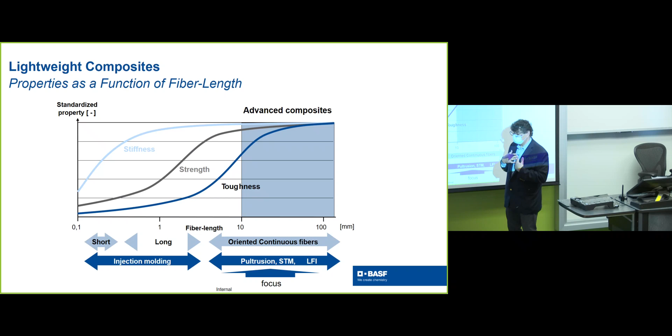As I said, we have this lab, and BASF really works in all spectrum of composites. From injection molding, we do small pellets with short fibers. But our team is really focused on the area of high toughness, high strength and stiffness all together, because we want to utilize the length of the fiber. The longer the fiber, the higher the strength. So for each fiber size, there is a technology to manufacture that.

You can see it on the lower bottom, but I'm going to focus on two technologies that we think are a breakthrough in this area, which is pultrusion and spray transfer molding.

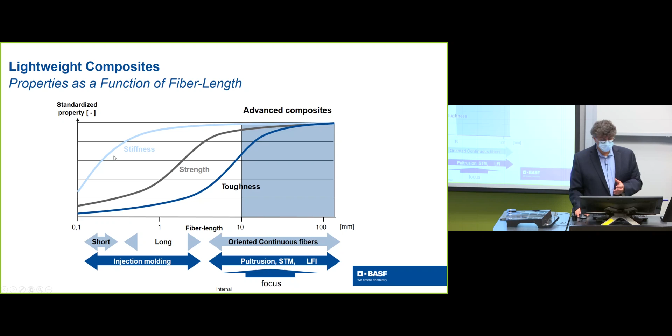Now, pultrusion, you might say, why pultrusion? If I look at this graph, pultrusion shows the highest strength or tensile strength, and the reason is it has a higher volume fraction of glass fiber. So it's tempting. And if you compare those numbers to high strength steel, I am there. So this is really good. I'm comparing this to steel. This is much lighter, but yet it gives me the strength.

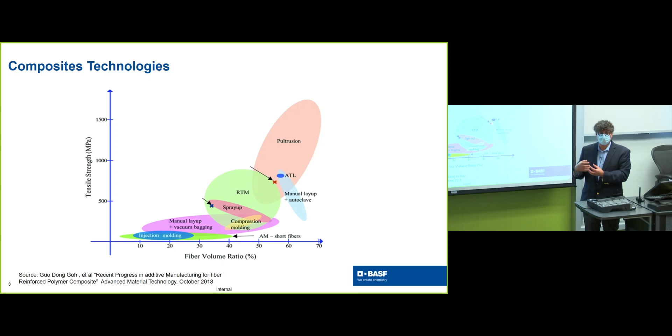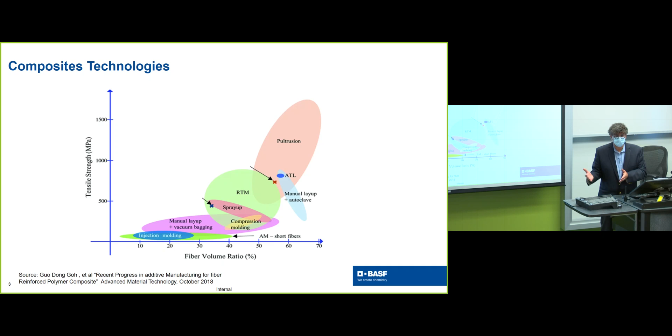So that's one advantage. The other one we looked at is RTM, or what we call high pressure RTM. High pressure RTM was used in the industry, they like it for automotive, but it doesn't give us enough parts per year. And they're not happy with that, because if you think about Ford and Toyota with those big cars, they make 150,000 a year. So 40,000 doesn't fit. That's where we said, let's focus on pultrusion because it's high strength.

I can really look into how I can accommodate that as a high throughput, and we'll talk about it. And also, there's a technology that we adopted and developed. We call it STM, spray transfer molding, and I'm going to talk about it more.

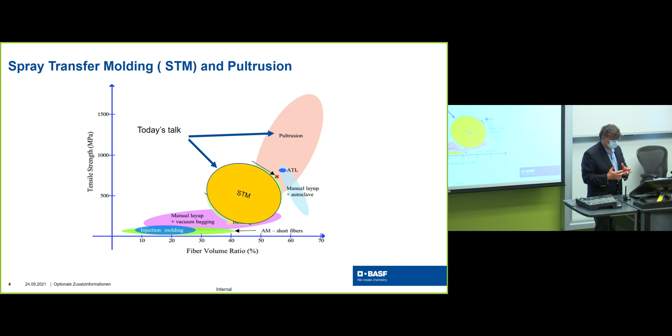Now, high pressure RTM, I don't know how much you know about that, but it's eventually resin transfer molding. That means I have a resin and I will inject that resin into a cavity. To do that, I need to have layups with the fabric. I have to put it in a tool to preform it, to have it almost the same shape as the end part. Once I have it stabilized, I will take it and inject at high pressure.

Remember, fibers here are continuous fibers. So when I inject, some of the inlets could be on the side, not the top. This could distort the fibers. Then we wait for curing and demolding. So that's the whole process. But eventually, you can see it's 2 steps, meaning every step is a cell or a production place in the industry.

Now, let me lay down the disadvantages. If you inject urethane, which is a liquid, onto a dry fiber, think about it. High pressure coming into that inlet will first start pushing the fabric away because it's a high pressure. So I don't get the benefit of continuous fiber because it gets distorted. The other thing is the cycle time is not there yet, it's like 3 to 5 minutes.

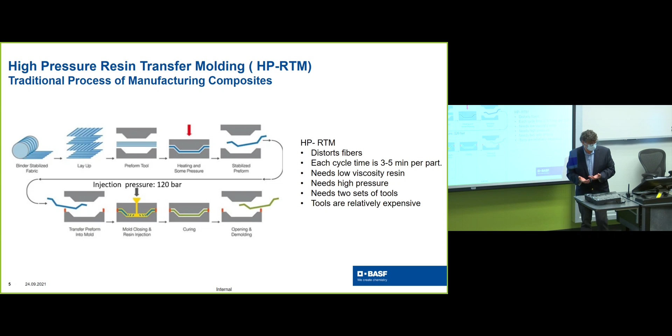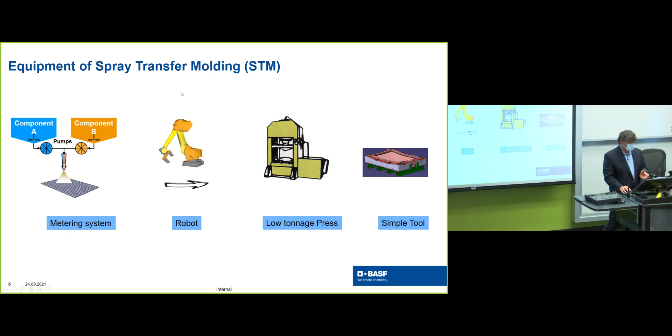So the alternative is what we call spray transfer molding. This is a technology where the equipment is like a metering system, meaning I have the liquid chemistry - an A and B component that come together and start reacting. So I have the equipment, I have a robot, and the robot is the center of this application. I'll explain how. We need a low tonnage press and a simple tool. So from a cell equipment standpoint, it's much cheaper than high pressure RTM, but in terms of what it does, it makes a lot of impact.

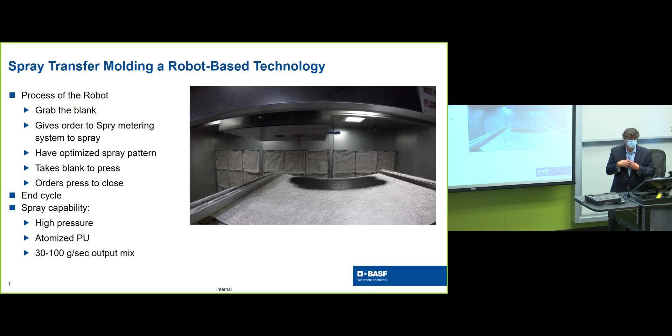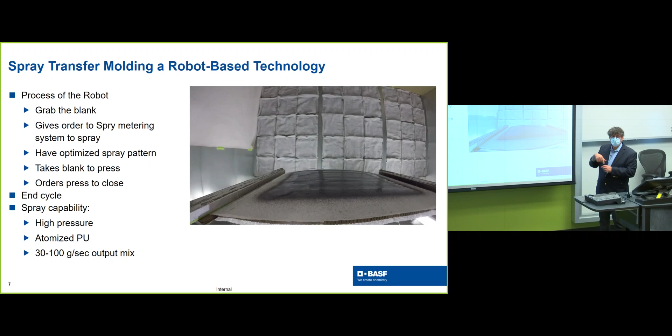I'm going to play this video and you can see what's going on. So I have a robot, and the camera is on the robot. The robot comes and grabs the glass fiber, as you can see here. Now the robot gives a command to the spray to start spraying, and we program where we want to spray. On the other side, I can also spray a glass fiber. Look at it, I optimize the spray, now going around like the pinch edge. So eventually, I can control where I want to put the spray. Not only that, I don't have lots of scrap, and it's at 90 degrees, if you notice. So eventually, I don't distort the fibers. There's lots of advantages we can benefit from.

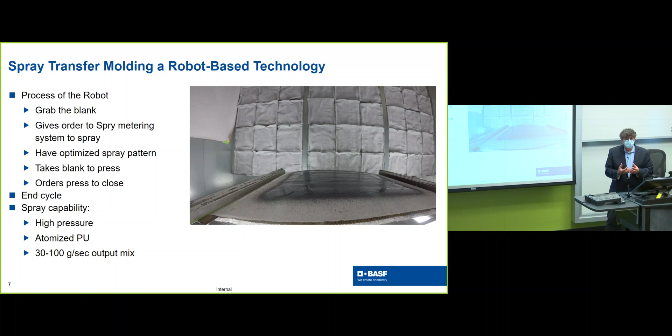Now, if you notice, this is a honeycomb. This is a technology for making a honeycomb load floor that we're adapting to make more of a composites part. Now, the robot goes to the press.

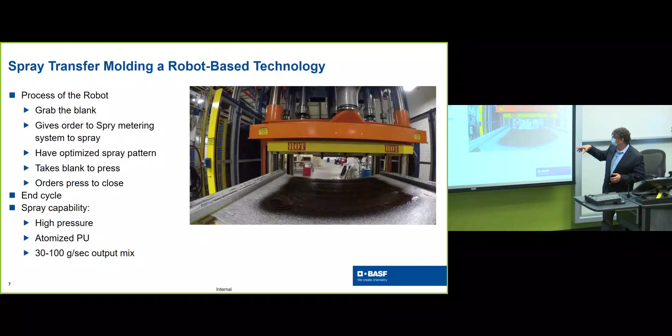There is a tool in the press, of course. Then the robot closes, the tool closes, the robot gets out, and orders the press to close. So eventually everything is controlled by the robot. The robot talks to all those stations. And if I don't like the outcome, I can go back to the software and change the spray pattern.

I'll show you some pictures. So all in all, as you notice, we take an empty dry fiber and spray it on top at 90 degrees. That gives me an advantage. The cycle time you saw here, part to part, is 90 seconds. So I'm saving from 3, the minimum, to 5.

I'm starting from 90 seconds, and even in that time you saw the robot spraying one side. We can have the robot put 2 spray heads so it can spray both sides, cutting the cycle time much more. So there are lots of advantages in this technology.

The other thing is this is high pressurized, atomized urethane that gets into the glass fiber. So it penetrates well, it impregnates it well, and I impregnate locally. I can spray from 30 to 100 grams per second, it depends. Right now I'm only spraying 30 grams per second, and that's enough.

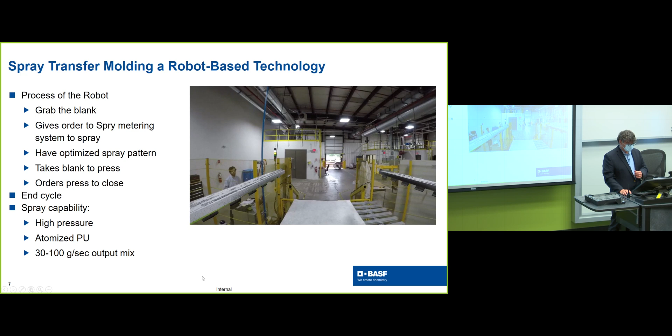So eventually that goes back - I'm ahead with the slides - it's really localized wetting, and we're emphasizing that. I program my robot where to spray and how to spray. Keep in mind, you need some knowledge of the urethane, or the liquid, and how it's going to flow in the mold. That gives you an advantage.

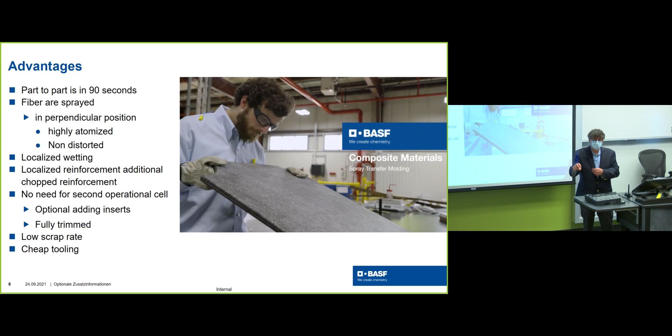Because I don't want to spray places where the flow is going to go into the cavity and get stuck there with a lot. So I have to spray more in certain areas, less in other areas. I have that option, and I will show you some parts.

So this is a huge part. When you come to my lab, you will see it. It's an underbody, about 1.5 by 1.6 meters in size. It has corrugation because this is a tool we made - we wanted to go after things like truck beds and the underbody of the car. The truck bed, if you notice, is corrugated kind of a thing.

The first run, we did the sample spray. This is the latest, but this is the more... If you notice, I sprayed first, and if I enlarge it - or you can come see it - you see lots of gaps here on the edges, and it doesn't cover those gaps very well, while I have lots of urethane in the middle. So what we did is we went back and optimized the process.

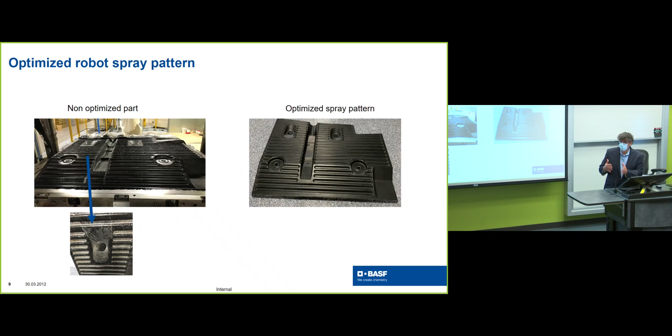I have more urethane sprayed on the upper side, less urethane here, by changing the height of the robot, the speed of the robot, and where to spray. So I got the perfect part. It's beautiful, actually - I always call it a beautiful part, but it is a good part. So we know that by optimizing, it gets you where you want without really distorting the fibers.

So where can we go with this technology? I have a small video on that.

As I said, the honeycomb application is where we started - that's the part in your hand. It has a core, paper core, and glass fiber on top and bottom. But we can go beyond that. We take the glass fiber and change it to natural fiber. We can take the paper core and change it to no core, getting more of a thick composite.

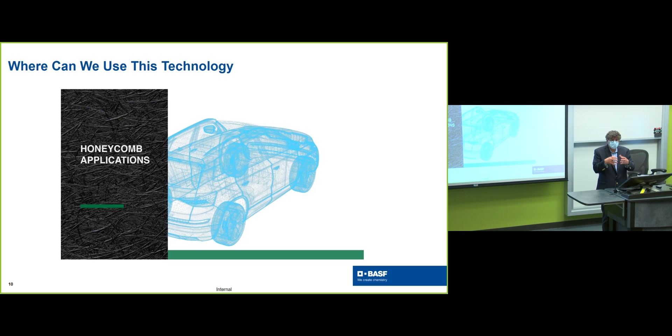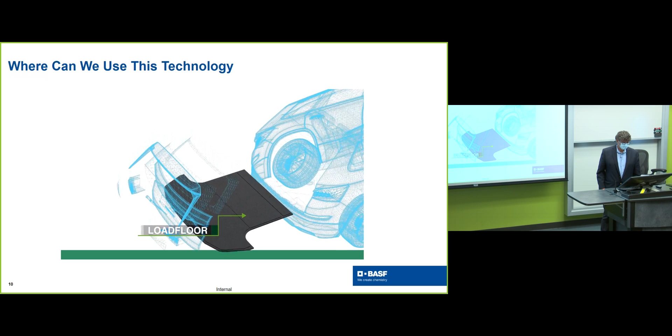You can see load floors. If you have an SUV car, all the SUVs have load floors now. So it's in your car now.

Center console, we're working on that. Actually, Julia was working on that with us, and we made some parts with Professor Bano. I'm going to bring those.

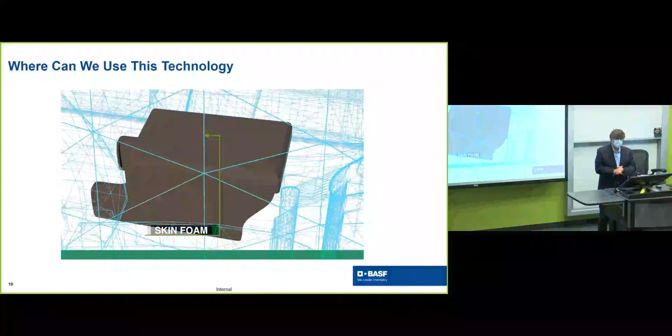And when I put skin foam, that means we can add to it. So the beauty of this application is that I can add things.

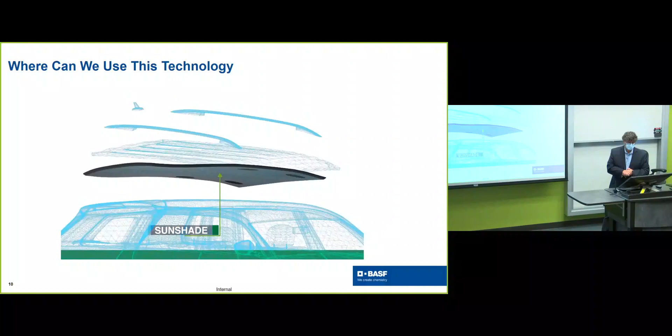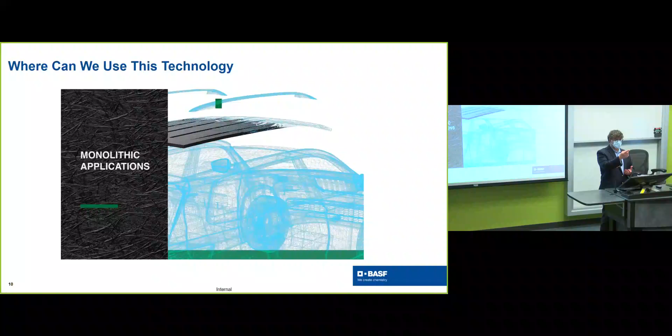Now we call this monolithic - that means we're taking away the core. As you notice, this honeycomb is so light, it's the lightest composite. I have the highest stiffness there, but we can also go monolithic for rooftops. You can see that in different cars nowadays.

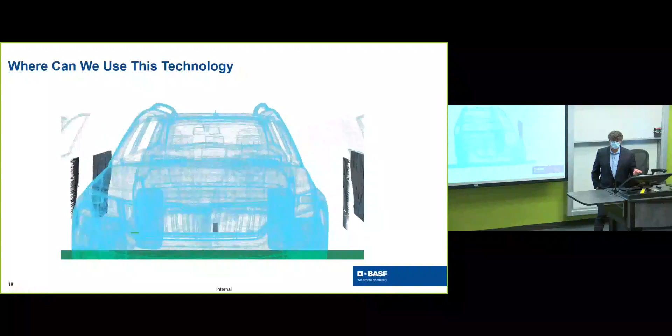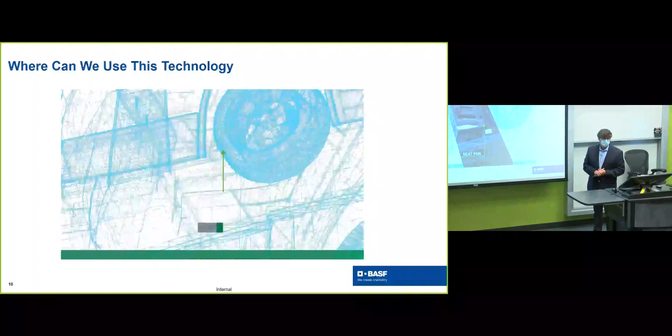Door panels. Seat pans. And we made all those parts, so we have them. We know how light they are.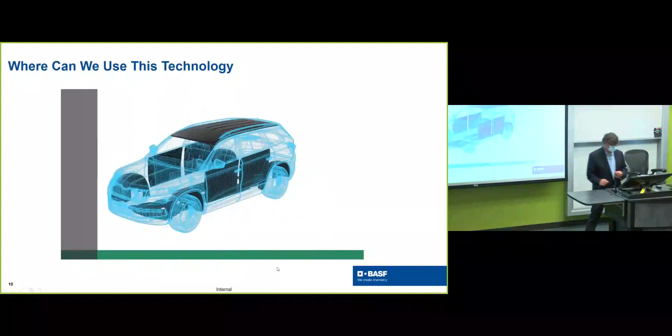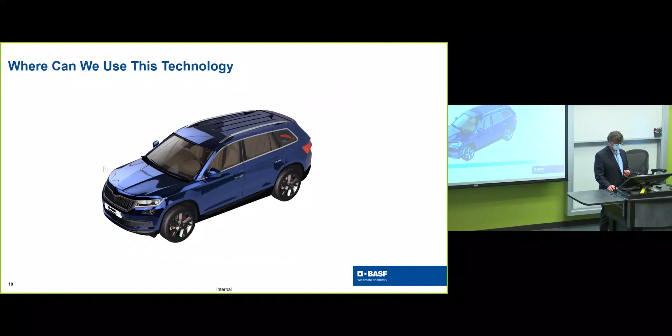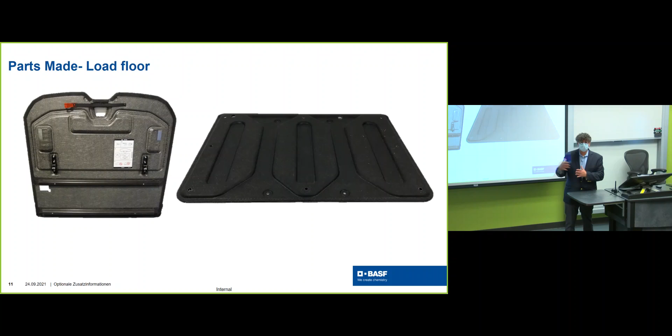So I'm going to go back and show you where this technology can take us, to multiple places with high volume production. I'm going to show you some examples that we do right now.

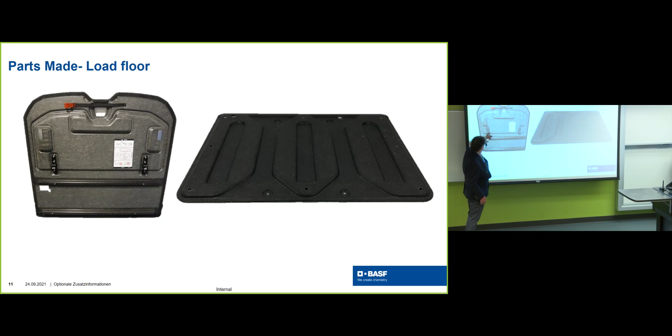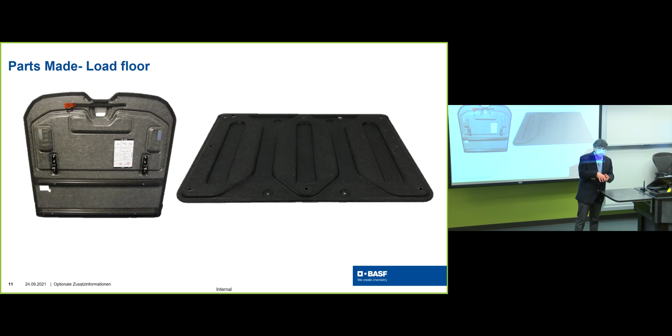This is the honeycomb load floor where we started. You can see it has inserts in it. Eventually I can cut the part to the size I want, put the inserts, all will be put in the tool, so I don't need to do secondary process. All is done in one process, in one cycle. That's the advantage. This is the part in your hands.

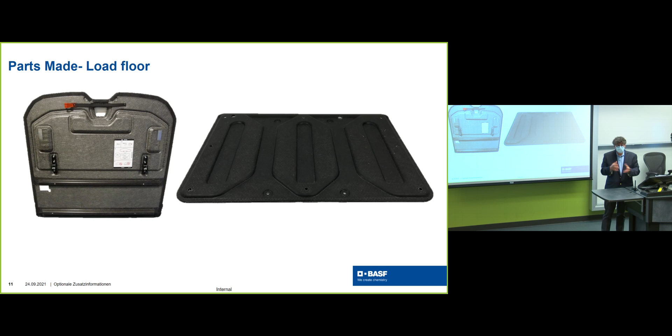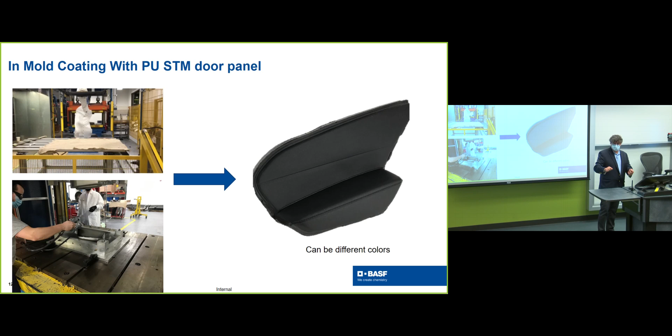So you can add to that. This technology is not only for making plain parts, we can add colors, and we can add a good surface look. We can also do soft looking surfaces, like the foam on the seats of chairs, we can do that as well.

Same concept, and here, although you can't see it, we add inserts in the tool. Those inserts are 3D printed right now, but they can be incorporated, so eventually I can add attachment points.

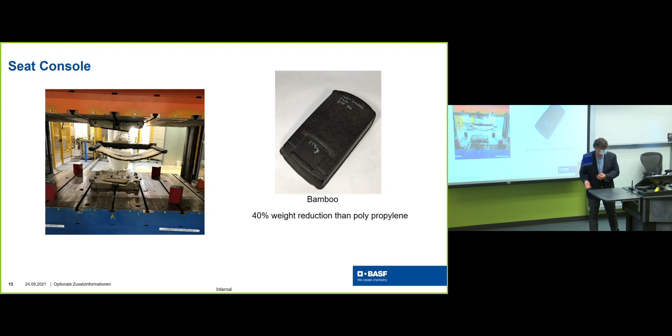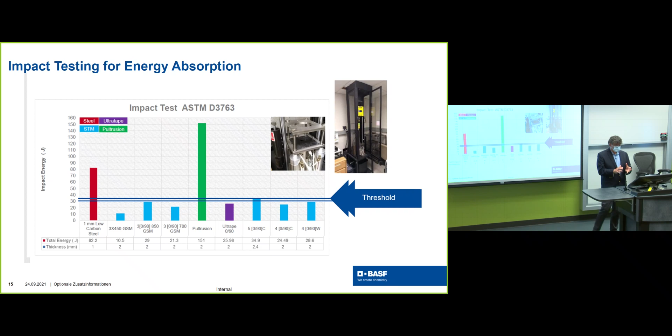So all in all, this is a technology that can fit multiple applications for automotive lightweighting.

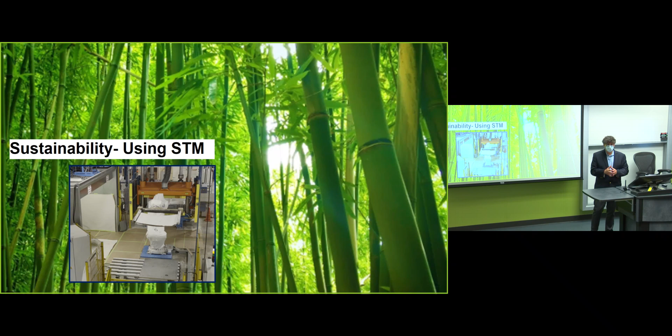Now, this is not enough for us. We are really interested in sustainability, and that's where we want to drive the new technologies. Sustainability is very important for BASF, but eventually it's global, and we are interested in getting into that field.

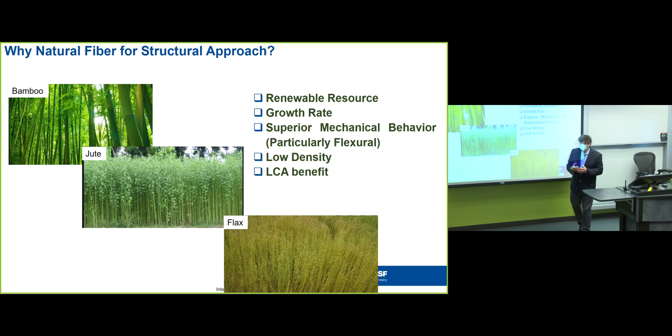With that, we are trying to experiment with bamboo, as I showed you before, but we have more interest to grow that business with jute and flax. Bamboo, as you know, grows so fast that it's in abundance, so we're not inflicting punishment on nature, rather the more you cut it, the faster it grows. So there are lots of values. It has low density, and of course good LCA benefits.

As you can see, I need it to be non-woven, like this kind. This is flax. So if I can create these in a non-woven fabric, I can utilize that.

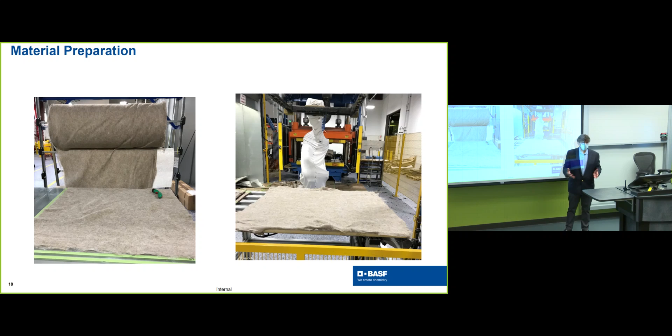This is the bamboo. We're working with Professor Banu, getting the bamboo. We're finding great value because we're comparing different species, and bamboo is giving us good performance, and that's very important. So I don't need to use a lot of bamboo. I can use it on the outer surface where there's the most deflection, to get the benefit of the fiber itself. And with bamboo, I can get any length of fiber, as Professor Banu promised me. I hope we can still do that.

Of course, like with jute, this is non-woven, so we're adding basalt as well. Basalt, which is a small net. I don't want it to add weight. The density of basalt is a little higher, on the higher side, but we're trying to be conservative while adding to the strength.

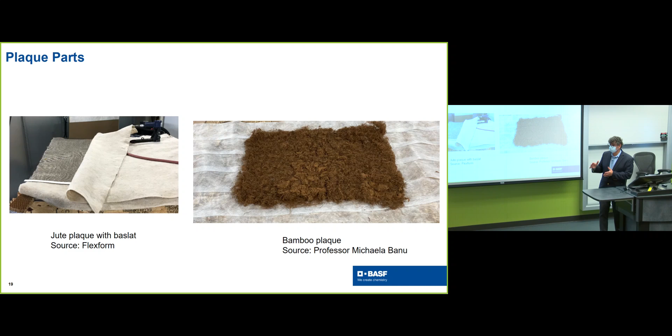If you compare jute and basalt, the minute I add basalt, I increase the strength and the stiffness for sure. But here's the nice graph I'm proud of. This is comparing a glass fiber honeycomb that we made versus the bamboo fibers we got from University of Michigan, comparing 4-point bending. This test was done here, and the stiffness is close enough, and the strength is at the same level. This is encouraging because I can now think about structural or semi-structural applications and implement that.

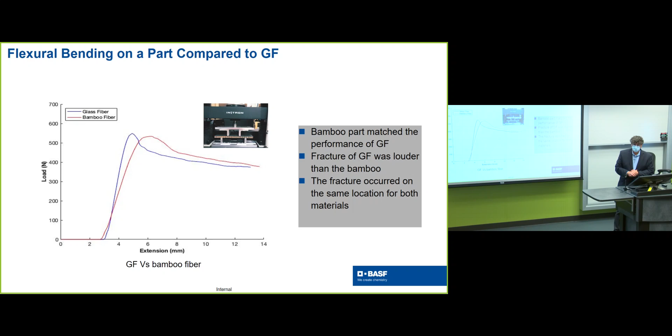I already presented some of this concept to the tiers. They want the bamboo, but I cannot find it. It's still a low commodity, but it has an opportunity to grow.

One of the things they were worried about, because it's a natural fiber, is how it behaves when it touches water, because the application has to be exterior. So we put it in water, and our customers actually left it for a longer time. It did not uptake water, and the reason, I believe, is the urethane, which is a low viscosity liquid that encapsulates the natural fiber, so it does not allow it to uptake water. So there's an advantage to that. You can use it without fear that it will take on water, which is important because you don't want to drive a car and have your part start swelling because it's raining.

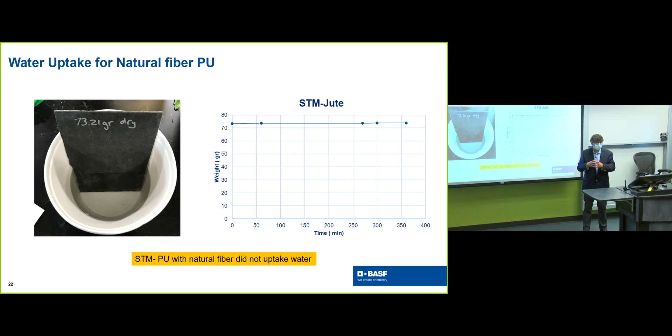The reason is our polyurethane also has biorenewable content. So that's one thing, and also the natural fiber. All in all, we have better performance on LCA because of the sustainability and biorenewable components we have in there. This is a good technology to continue on, and that's what we're promoting, especially since a company like Ford is really happy with sustainability.

With that said, this is not enough. We need to look for new opportunities, and that's where I'm presenting the new concept to see where it lands, because we started with some ideas, but eventually we want to get your thoughts and explore a partnership if there's an opportunity like that.

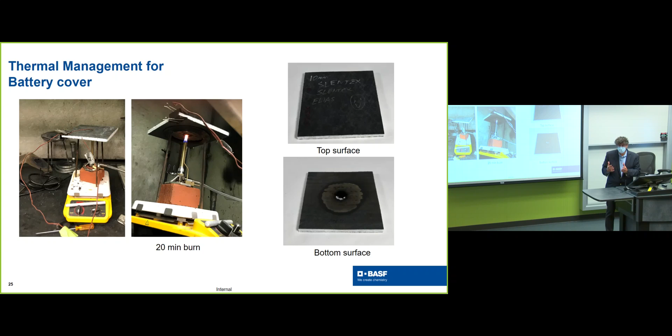So we tried with aerogel. This is a material we used to have, but not anymore, Slentex, and we did the burn test. I did some testing, but there are opportunities with different materials that have lower thermal conductivity that can allow thermal runaway management for transportation.

I can show you with this material, we were happy to see that with a 15 millimeter thickness, the middle side was about 300 degrees Celsius, while the top side was about 64. So this is really nice, although it was under burning conditions. But this is not the actual test. We're doing the actual test, but that gives us a good indication that we can go forward with this kind of material.

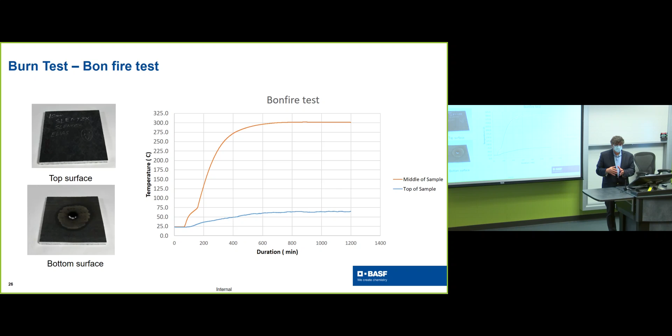But this is still the first couple steps, I would say, because there is lots of opportunity to improve and work on, and there is lots of opportunity here.

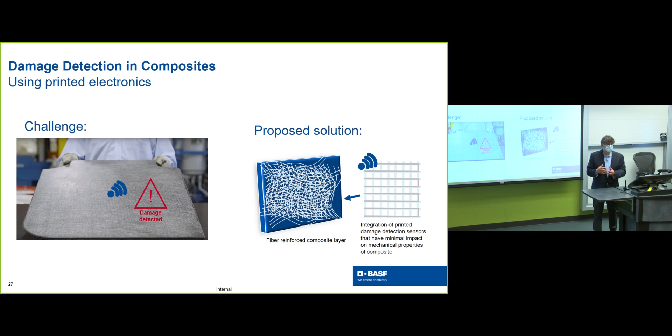The other thing we always look into with composite, it's lightweight and everything nice, but we need functional composite. We need the part itself to communicate and alert me, maybe communicate from outside, also give me an alert if there is damage. So that's where we highly want to invest in sensors and detection of failure. There are opportunities in this area as we speak.

With that said, this is all spray transfer molding. Now there's another technology we're working on, pultrusion. And I showed you why pultrusion, because of the strength. Pultrusion historically is an old technology, so I'm not bringing anything new, really. Now I want it to be new because it is important.

So the part you saw somewhere there—where did I put it? Yes, this is actually just this year. This is a part in the car, and I will show you this slide. That's a pultrusion part. This is a breakthrough. Automotive has used pultrusion here and there, but this is a high volume car, the Jeep Grand Cherokee, and it's taking a major role in getting an impact. I'll show you this slide.

So pultrusion has opportunities in automotive, although we're talking high throughput, it is a slow process in terms of how you get the material. But if we do the calculation, it is an okay process, but we need to add more value to it.

So with pultrusion, eventually you have a dry fiber. If you're not familiar with that—can you see the cursor? The dry fiber comes to a place called the injection box, that's where we do the impregnation. The injection box is designed to have high pressure so we can get good impregnation. Then it goes to a die that has a cross section. That die is heated in three to four different zones so you can get the end product. The advantage is I get high strength. The disadvantage is it's only one cross-section profile that we can get, only.

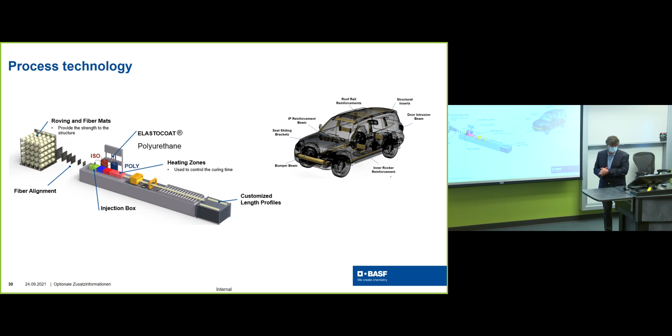As you can see, we can implement that in different places in the car. We did the study—before we go into any technology with companies, they like to do innovation, but innovation that has value in the market. So anything we do, we have to show the business case, how this could penetrate the market. So there are opportunities there.

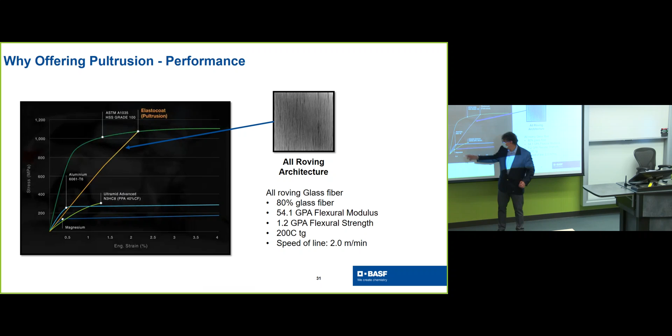Now, as I was telling you, this is pultrusion on all roving. It really can compete with high strength steel. Yes, it doesn't have the same stiffness as you see—it's enough like magnesium, but not enough like aluminum or steel. But if you saw that part I gave you, the inner part is pultrusion, the outer part is overmolded PA6, and that gives us the stiffness. Not only that, it gives me a way to do joining. So I have a way to increase the stiffness, pushing this graph in the left direction to give more stiffness, and yet add parts to it.

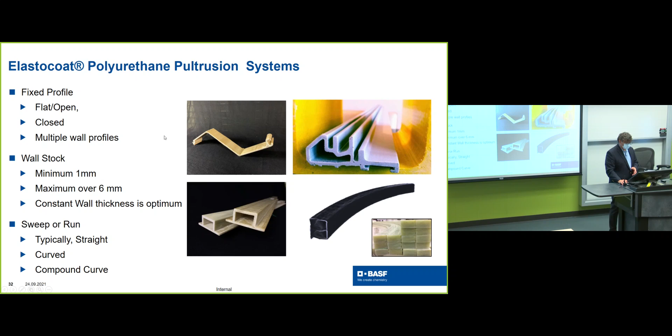But to get automotive convinced, we needed to build that in a simulation, and right now we don't have the right material card to do that. So what we do, we need to build a material card. We did a study on building a material card, and the material card is really focusing on post-failure, the dynamic behavior of the material, high strain and so on. So we did multiple fiber orientations—as you see, this is all roving.

So all the fabric came together. We did biaxial testing, meaning we took a fabric that has a 0-90 orientation, and we wanted to compare that. We also did a hybrid, where the middle is all roving but the outer is fabric. And we did uniaxial, which is all fabric, but only in the zero direction.

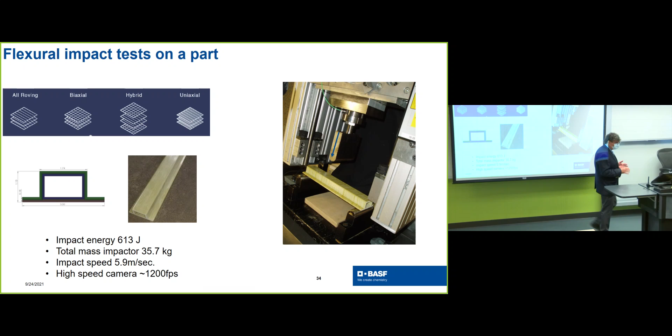We did batteries of testing, we invested heavily, and the outcome of this result, I like one graph on that slide that I always like, because we did impact testing on the hat part you saw in the first picture. If I do the impact test, all these graphs overlap, absorbing almost the same energy impact, but look at the behavior.

This is interesting. For all roving, this hat shape has walls that collapse, but the bottom side stays - the part did not fail fully, it still has resistance in it. That's all roving. When it bounces back, you can see the walls are broken, but when you look at the finished damaged part, the lower and upper surface still have a flat panel. So this is nice.

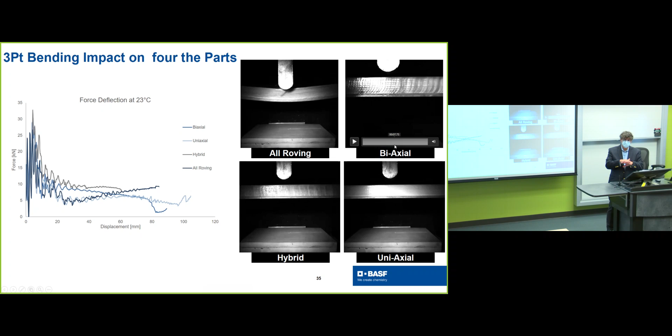Now the biaxial, the fabric with 0-90 orientation I told you about - we thought it's going to be better for torsion applications and so on. Look at the failure: first of all, the failure is like a V. The wall did not collapse, but when we saw the part afterward, it was all cracked and damaged all around except the lower surface. A totally different failure.

Now let me show you the hybrid. To remind you, it's a fabric 0-90 wrapped around, and in the middle it's all roving. It resists, it's not collapsing, and here's the beauty - look at it after the impact. It bounces back, almost like metal. It's so impressive - same volume fraction, same impact, same energy impact, but this did not fail.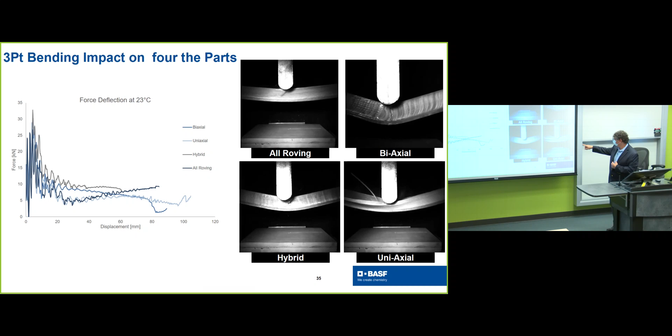Look at it, it's beautiful, I'm amazed. The uniaxial is where we start thinking - this biaxial is where we recommend and look at opportunities, because it can absorb impact and torsion, yet it behaves like metal. Although we're trying to replace metal, we also like the behavior of metal. So the uniaxial behaves like all roving - there's no advantage there, and it's more expensive. So that's out of the picture.

So this is like building a material card. With the material card, we were challenged to do testing at 23 degrees, 80 degrees, and minus 40 degrees - that's how automotive wants it all the time, all temperatures, to see how the material behaves. And we could really compare the actual testing to the prediction, and we could make it work.

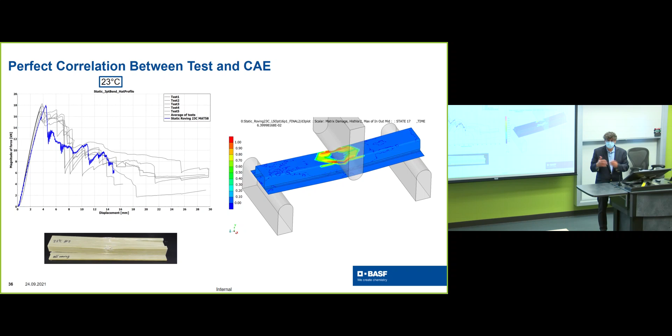That's where we presented that to our partner, L&L, and they went to - then it was FCA, now it's Stellantis - and that's where we were able to get this part, which we call a tunnel reinforcement. It sits here and is made to absorb an impact. We're replacing metal - we took 2.3 kilograms out of the car, but yet we increased the impact testing and impact absorption much more.

And we just got the Altair Award, and today they're presenting it for the Chemical Society, the SPE, to get another award. It's all about awards now because publicity is important too in automotive. But all in all, this is the pultruded part, this is the outcome part. But don't limit yourself to what you see here - there's always opportunity for how to incorporate things, to bundle it to get the outcome.

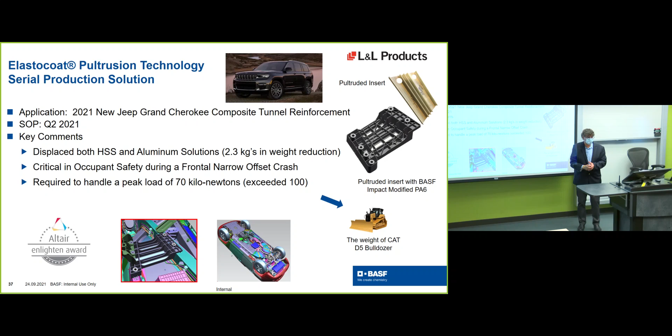Now this is nice, but is this enough? No. So the whole idea is we will start working with Professor Banu. We actually put a proposal to the DOE, but this is the foundation of where we want to go. As I told you, the profile of the pultrusion is either straight with the same cross-section - but what if I can start working on changing the shape of the part and changing the cross-section? That's where we start thinking of a shape-morphing pultrusion process.

Professor Banu has a good approach to it with adaptive manufacturing based on Professor Koren's kind of ideas. We have the concept, we have the foundation. We didn't get the money, but I think this is an opportunity to keep looking into, because we really put a lot of thought behind it. We identified an OEM, then we worked with Toyota, if you remember, and we looked at a part like a cross-car beam, which sits in front of you and holds everything, the whole dashboard.

That has to have different shapes, different strengths. So we identify everything, so there is an opportunity that we can manufacture this in an adaptable way that will give us the right cross-section and right morphing shapes.

Yeah, so that's a good question, it's always on our mind. Now I work with urethane, so it's not recyclable, but we're trying to do reusable applications for it - to take it, grind it, and find a reuse. Also, that's where we looked into doing the LCA to compare polyurethane versus polypropylene. How do I go up?

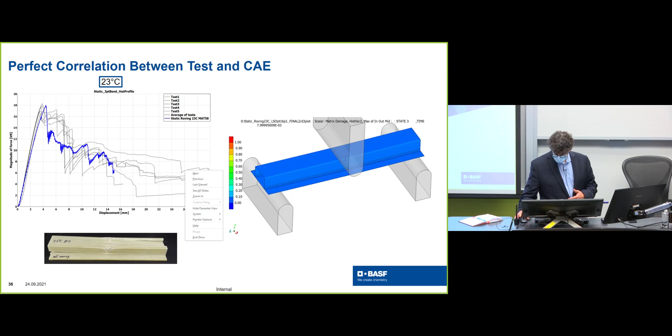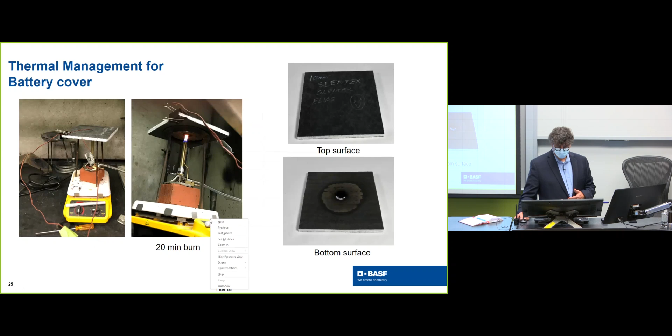And as you can see, I'm trying to get into the LCA part of it. So we are conscious to that, and that's where we are trying to implement more and more sustainable or biorenewable parts in the component. Now, hold on a minute, let me just get to the slide. Okay, this is the slide.

Yeah, thank you. Other questions? If not, would like to... Yeah, Mickey, I have a quick one.

Sure, please. Just with you mentioning the parts for electric vehicles and battery trays, I'm guessing carbon fiber is a mild conductor of heat, isn't it? Are there any tricks that you can pull to get the conductivity up to be able to actually get the heat away from electronics quicker?

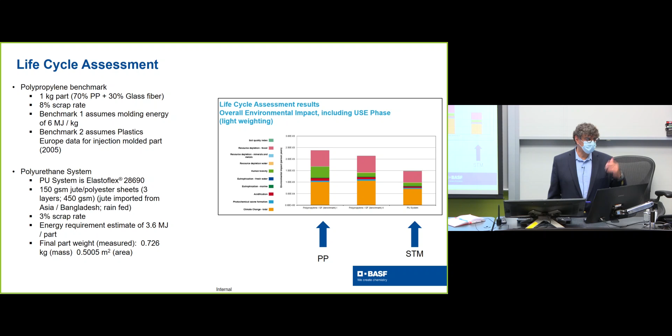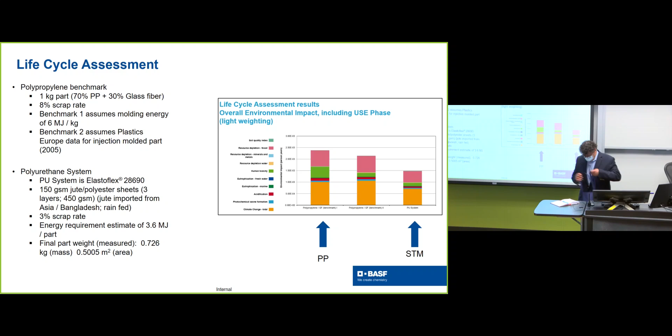Thank you. So, as a token of appreciation, we offered you a gift, here we go. ISD, that's why I came. Yeah, sure, so thank you once again, thank you for being so kind. Oh, sure, oh yeah, sure, I know my daughter will love it already. Oh, this is, oh I love that, integrative systems, that's your department, sure. Oh wow, oh I love that. Okay, I'm changing to this. Yes, okay, thank you, we'll see, yeah. Here we go, next time, and I will bring the part. Yeah, but thank you for having me, it's a pleasure really, and it's always good to get other ideas. Sure, thank you for coming, and this is an open discussion.